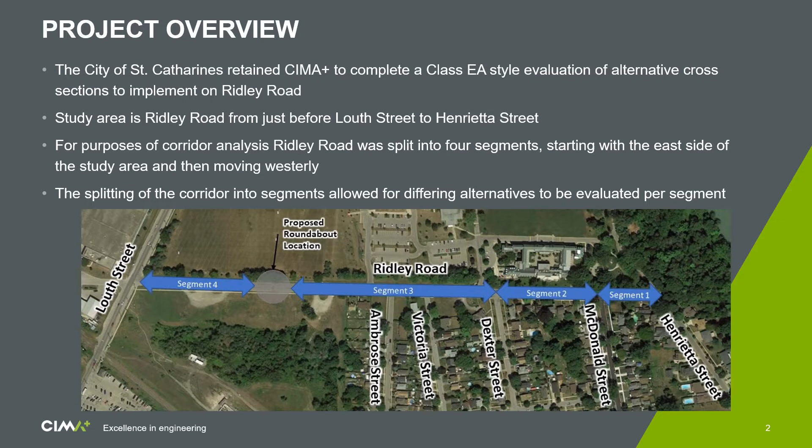For the purpose of completing this analysis, Ridley was split into differing segments that allow for a customized approach when evaluating alternative cross-sections. For this presentation, we're going to talk about existing conditions on Ridley Road, how the alternative cross-sections for each segment were developed, the analysis of the alternative cross-sections again per segment, and finally the alternatives selected for each segment. First, we're going to describe Ridley Road as it currently exists.

Ridley Road is currently an urban two-lane roadway with a sidewalk on the south side of the street, which is the side opposite Ridley College. The existing cross-section varies depending on location, but can broadly be described as either being fully urban, which means the roadway is paved and has concrete curb and gutter to aid in road drainage, or semi-urban, which means the road is paved but has no curb and gutter present.

The section from Dexter Street to Louth Street is considered semi-urban, and then from Dexter to Henrietta Street is considered fully urban. A traffic analysis was completed on peak hour volumes, which indicated that one travel lane is sufficient in each direction to accommodate future traffic volumes.

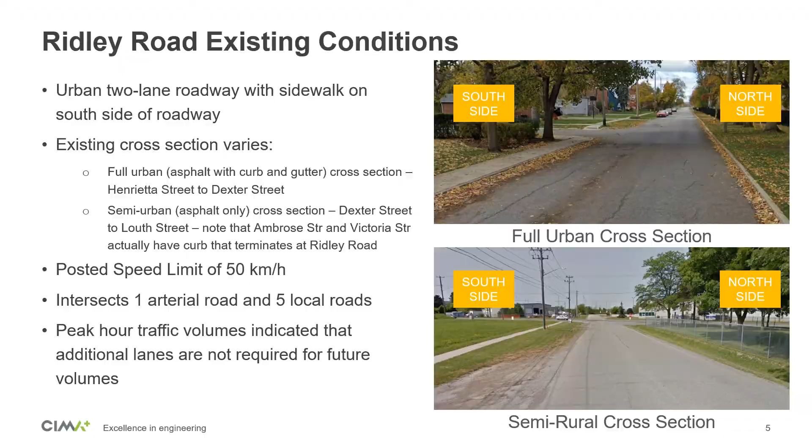Next, we're going to discuss which information was used to develop the alternative cross-sections that were evaluated for each segment. Several sources of information were used to develop the alternative cross-sections, including the city's transportation master plan, GO Site secondary plan, previous studies, and physical restrictions such as locations of existing hydro poles. In addition to the reports and studies, there was field information that was gathered, which we will talk about next.

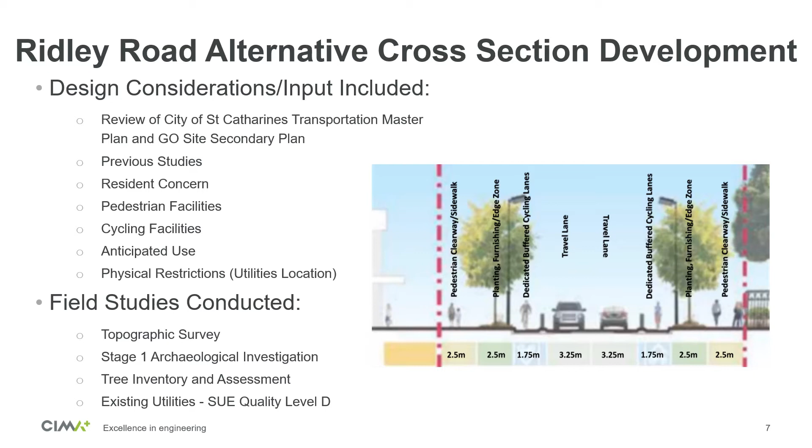There were 4 main studies completed to augment the information provided in the studies and the reports. The topographic survey indicated that the right-of-way, which is the total area owned by the city and includes both the traveled portion of the road that cars travel on as well as the boulevard areas, actually varies in width between 18 and 19 meters. Ridley College has agreed to cede an additional 1 meter buffer of land from Louth Street easterly to the main Ridley College entrance to provide additional lateral space for the city to use.

A subsurface utility engineering study was also completed to gather information on existing utilities such as gas, hydro, Cogeco, Bell, to augment the information collected as part of the topographical survey. Topographical information can best be described as existing elevations of features within the road corridor. So if you went out to the site, these are the elevations of all the things you see in the field.

A stage 1 archaeological assessment was also completed, which indicated there was a low potential to find anything of archaeological significance. Stage 1 assessments are routinely done as part of road reconstruction assignments. In this case, since Ridley Road had already been constructed, it's an existing road after all, the archaeologists concluded that there was little chance of finding anything of significance because the roadway corridor had already been excavated and disturbed at least once.

A tree inventory assessment was also completed by a certified arborist. The results of this assessment indicate the trees on the north side of the right-of-way, which is the Ridley College side, are in good condition and should be saved if possible. The trees on the south side have been heavily pruned, however, by the hydro utility and consequently are not in the greatest shape. Therefore, these could be removed if there is justification to do so.

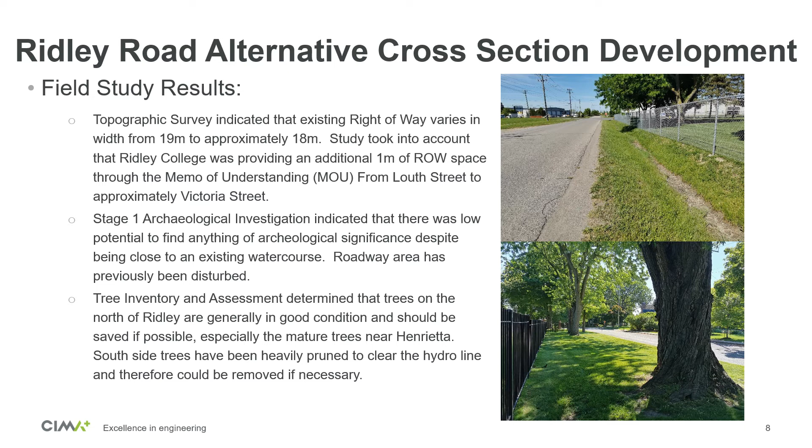As noted earlier, Ridley Road was split into segments for this analysis, with up to 5 different alternative cross-sections developed for each segment. Each of these cross-sections differ by having a combination of sidewalks, bike lanes, and boulevard spacing, or lack thereof, of varying widths and configurations.

For example, the bike lanes could be completely separate from the travel lanes. They could be part of a shared vehicle lane that's wider than a standard lane, or even not present at all. Sidewalks could be 1.5 meters wide and located within the boulevard, 1.8 meters wide located adjacent to the proposed curb, or replaced by a 3 meter wide multi-use path.

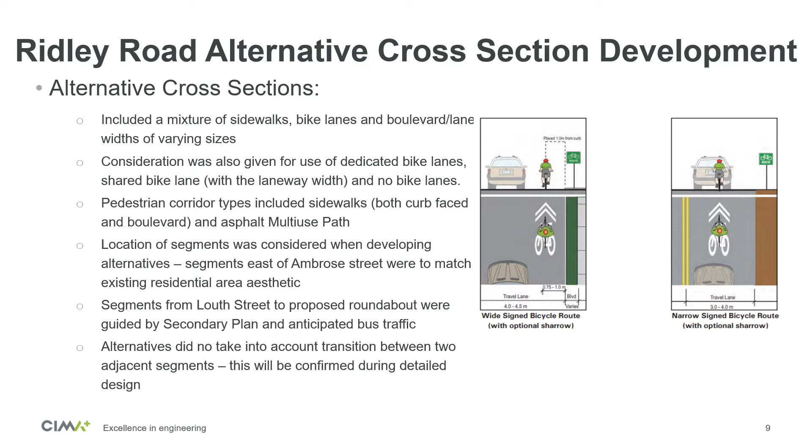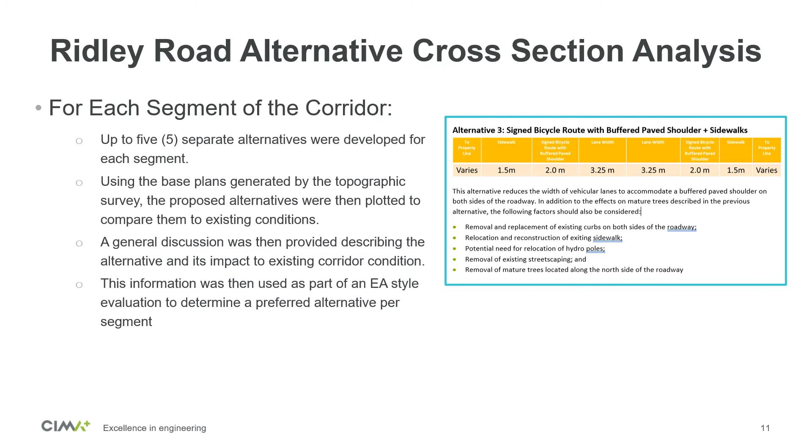Once the cross-sections had been developed, the next step was to evaluate the alternatives per segment. Again, up to 5 alternative cross-sections were developed for each segment, and again there are 4 segments. Each of these alternatives was then drawn on top of the existing base plans, and the plans reviewed to determine the impacts, both positive and negative, implementing the proposed cross-section would have on the existing corridor. These impacts were then used to complete an EA-style evaluation of each alternative cross-section to determine a preferred alternative per segment.

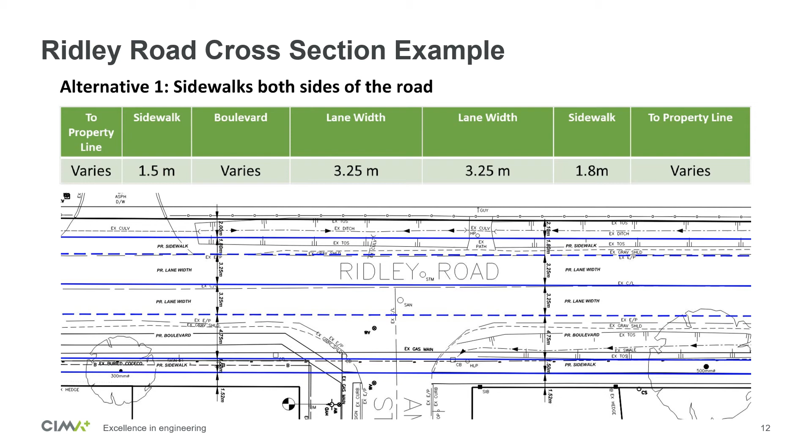Examination of this alternative against the base plan displays that 2 of the existing south side trees on either side of Ambrose Street would need to be removed to facilitate construction of the south sidewalk. This is an example of the positive and negative impacts noted in the previous slide.

The evaluation of alternatives was completed by determining various criteria, also known as factors, to compare the alternatives and then complete the analysis. The alternatives were ranked on each criteria as having the most benefit, least benefit, or somewhere in the middle. This is known as a qualitative analysis since the alternatives are ranked against each other as opposed to using a formula or some equation to calculate a number and then use that number to determine the rankings. Note that each alternative could be scored the same, so it would be possible, for instance, to get 2 alternatives within the same segment that have the highest benefit, or 2 alternatives that have the least benefit.

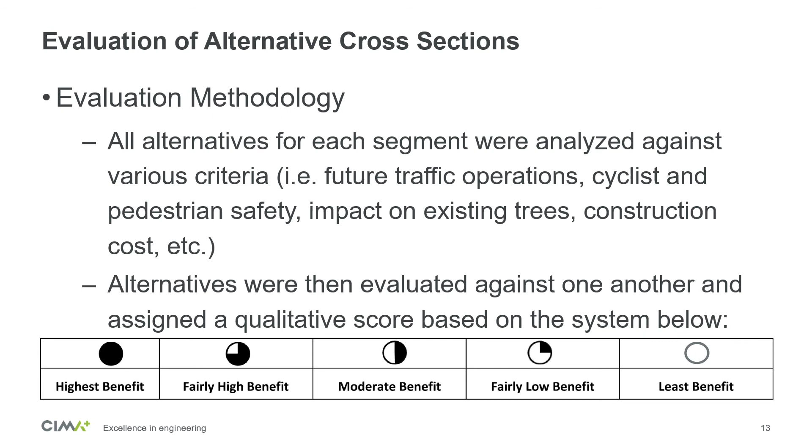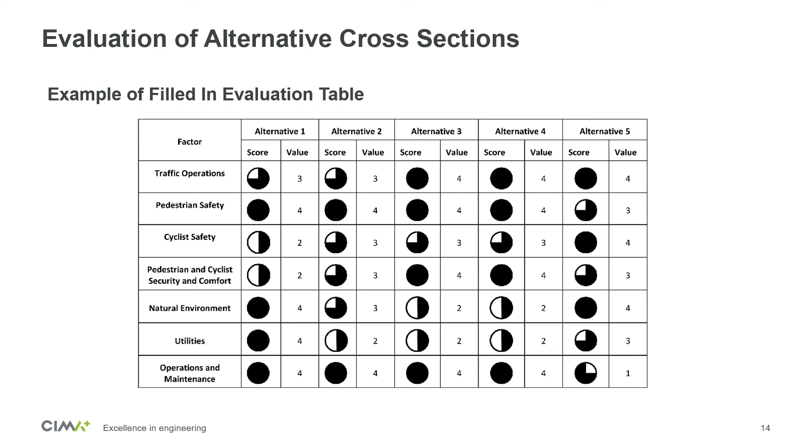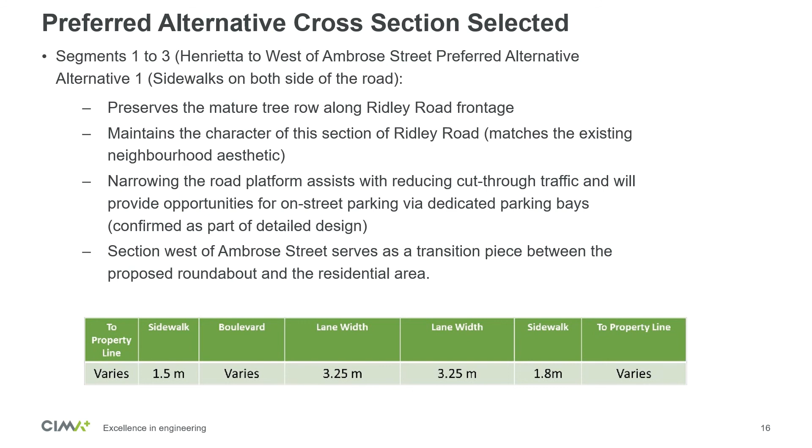Finally, we're going to discuss which preferred alternatives were chosen per segment. For segments 1 to 3, which is from Henrietta to west of Ambrose Street, alternative 1 was determined to be the preferred alternative. This alternative is preferred since it matches the existing neighborhood aesthetic of the residential area to the south, i.e. it looks like it fits in with the character of the neighborhood. It preserves the mature trees along the north side of Ridley Road and has a narrow lane width to dissuade cut-through traffic from accessing St. Paul Street West by traversing through the existing residential area.

For segment 4, which is from the proposed roundabout to Louth Street, alternative 3 was determined to be preferred. This alternative is preferred because it has physically separate bike lanes for bicyclists and vehicular traffic to improve safety. It includes a wider vehicle lane to accommodate GO bus traffic, and it has sidewalks on both sides of the street.